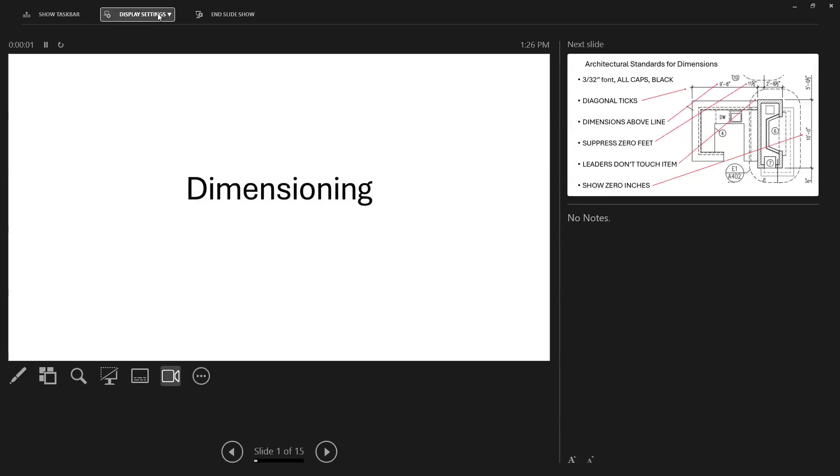Okay. So you typically do dimensions at 3/32 font, all caps, black. You do diagonal ticks. Architects don't use little arrowheads on their dimensions. They use diagonal ticks. That's what this little 45-degree angle line is. The dimensions go above the line. They don't stop the line and then float in the middle of the line. The line runs all the way through and the dimensions are above. You suppress 0 feet, so you don't show 0 feet, 11.5 inches. You just show 11.5 inches.

The leaders don't touch the item. This line's called the leader. This is called the dimension line, and that's called the tick. So the leader doesn't actually touch the item.

Now, Revit's got this all kind of idiot-proofed, and AutoCAD does if your people have set up your dimensions properly, but it's possible to mess this up if you set up your own dimensions and you don't know what you're doing. But you do always show 0 inches. So you don't show 0 feet, but you always show 0 inches. So if I have a 10-foot 0-inch dimension, I always show the 0 inches. Any questions on any of that? Okay.

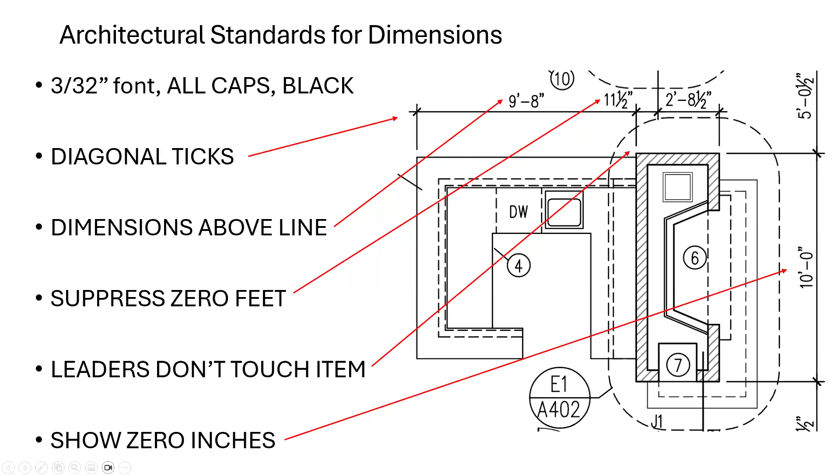So dimensioning, best way to dimension stud walls. I found this on an online forum. Now this is actually pretty smart. If this person hasn't been on the field or they're starting out in their career, apparently this office has a difference of opinion inside the office of how they dimension.

So this person says, from what I've seen, architects dimension interior walls one of 3 ways: face of finish to face of finish, face of stud to face of stud, or center of stud to center of stud. They do face of finish to face of finish, but he says it makes the least sense to me. We wouldn't dimension something that doesn't yet exist, but it seems like a lot of architects do it that way.

So they say the architect should communicate the intent, which is a 5-foot wide corridor, and leave the rest to the contractor and framer. It seems to me the clearest way to do it would be to face of stud or center of stud, since there can be no confusion as to which side of the line the studs go. So anyway, let's move on to what the contractors came back with.

I dimensioned to face of stud for exterior walls and interior walls. Having snapped out decks and slabs for wall plates, that is what I prefer, and that is what's preferred by the framers and builders I know. A note is on all plans stating that unless otherwise noted, exterior walls are 2x6 and interior walls are 2x4. A key is used to call out exceptions.

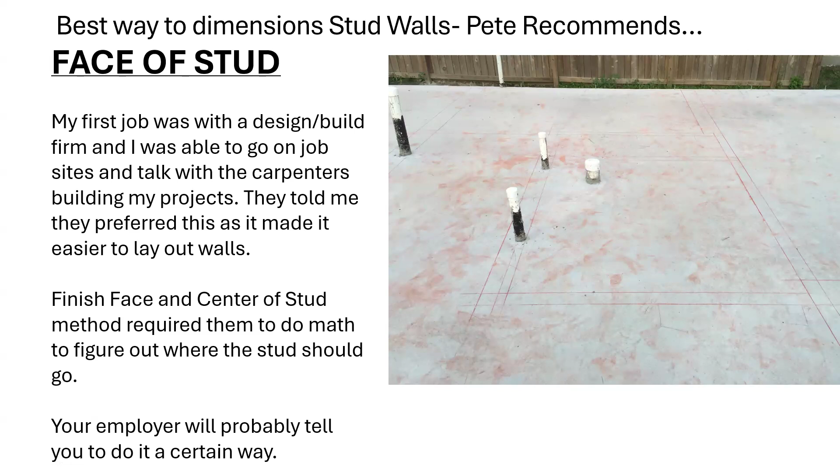And they said they always wanted me to go with face of stud because it made it easy to lay out walls. The other ones, if you go to finish face and center of stud, they have to do math in their head before they can figure out where they're gonna snap those lines. Cause like this line is 3.5 inches wide for putting a 3.5 inch stud wall on there. And they have to do math in their head. Now, having said all that, your employer might have a certain standard that you have to follow. But I'm gonna try to convince you why snapping to face of stud makes most sense.

So once those lines are snapped, they actually use those snapped lines on the deck. So you can see here, here's the line snapped on the deck with the chalk lines. And now this person is actually going to be building the stud wall, laying flat on the deck, and they're using those snapped out lines to mark where they have to put their partitions in the wall.

So I'm gonna show you two quick videos. One shows how they go through and lay out these studs.

I wish Daniel was here because he was a carpenter. He can tell me if they did it this way or not.

And then I'm going to show you this where we'll skip to the parts where they show them laying out the house with the chalk line. So let's first watch what's involved with the contractors to figure out where they put the studs in the stud wall.

That's what we did. When you work construction? Yeah. Okay.

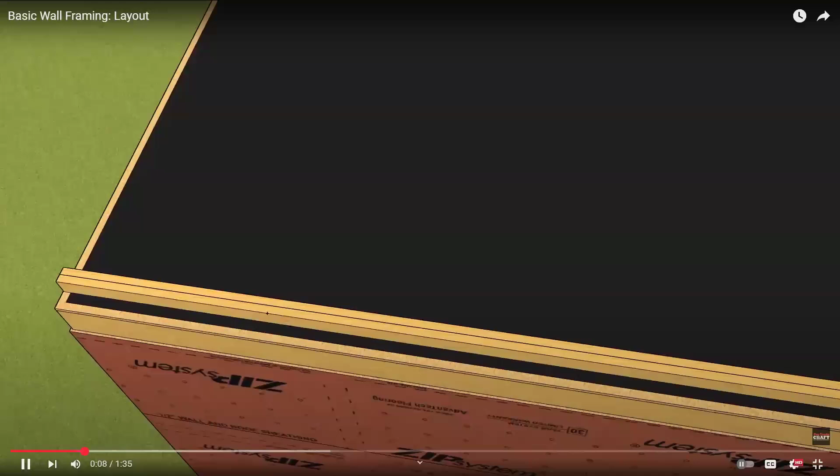Wall framing is the art of marking meaningful hieroglyphics onto wall plates that represent finished wall. Begin by stacking the top and bottom plates together. They should be exactly the same length, or the wall will never be square. Hook one end of the wall plates and work your way down to the other, marking the centers and rough opening size of all windows and doors.

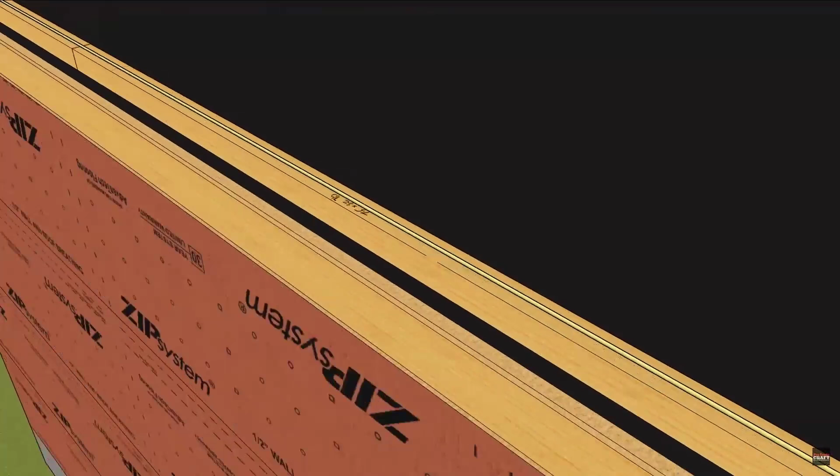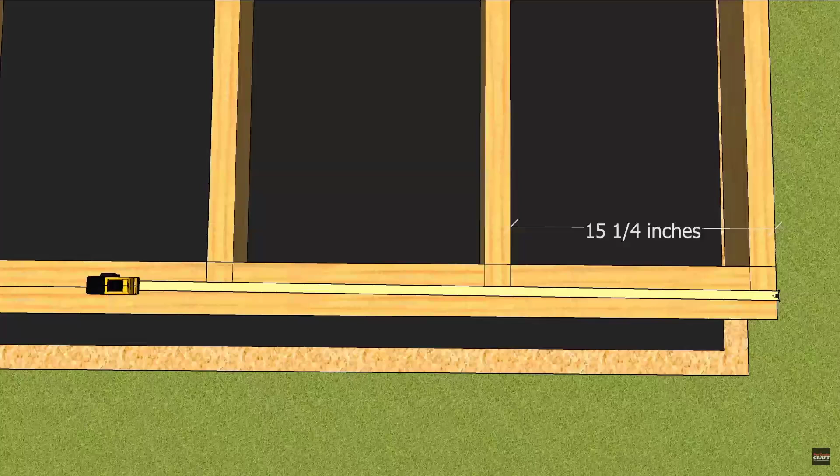When you reach the end, hook your tape on that end of the plates and work your way back, marking stud layout. For 16-inch on-center framing, the first stud line goes at 15.25 inch, which places the center of the stud at 16 inches. Following studs are also marked 3/4 of an inch before the red stud marks on your tape measure. 31.25, 47.25, 63.25. The line marks the edge of the stud, and the X indicates on which side of the line to put the stud.

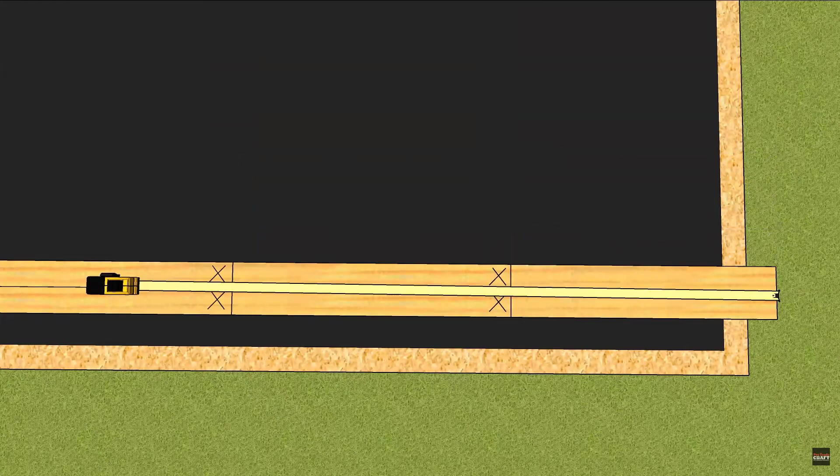Keep marking through the rough openings because partial studs will go above and below the window opening. When the plates are laid out, spread them apart, frame the window openings, and then fill in the studs. We'll cover framing window openings in another video.

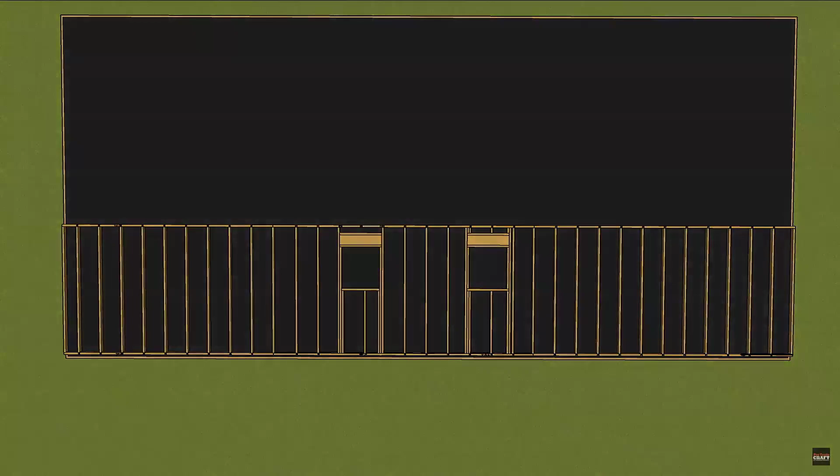Okay, so that's the fine points of laying out the stud walls. Now I want to show you the time lapse. I don't know if you know this, I probably showed you other time lapses. I love construction time lapses. So I'm going to skip around on this, but I want to show you when they're laying out the walls and framing the walls down low.

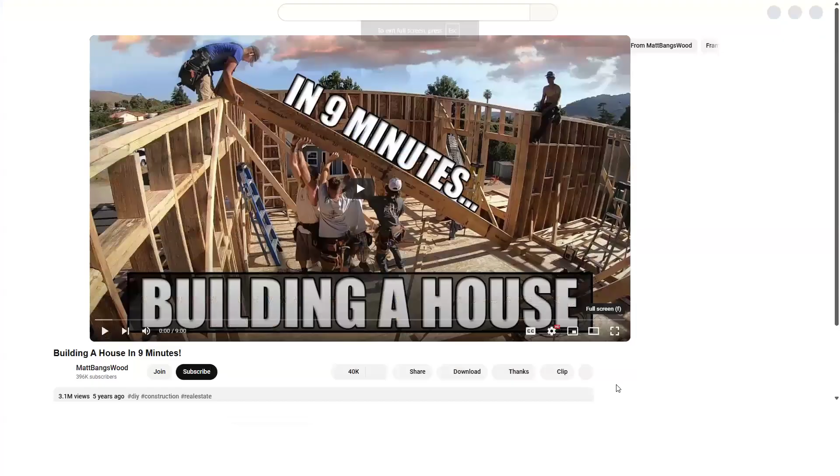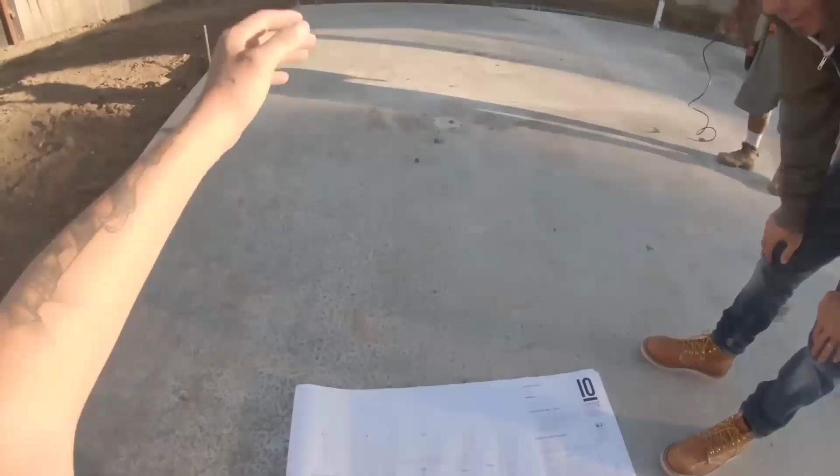So we'll snap this back wall first. There's a separation detail between addition and existing. So we'll snap 5.5 back wall on here. We can snap these guys, go parallel across, and go from there.

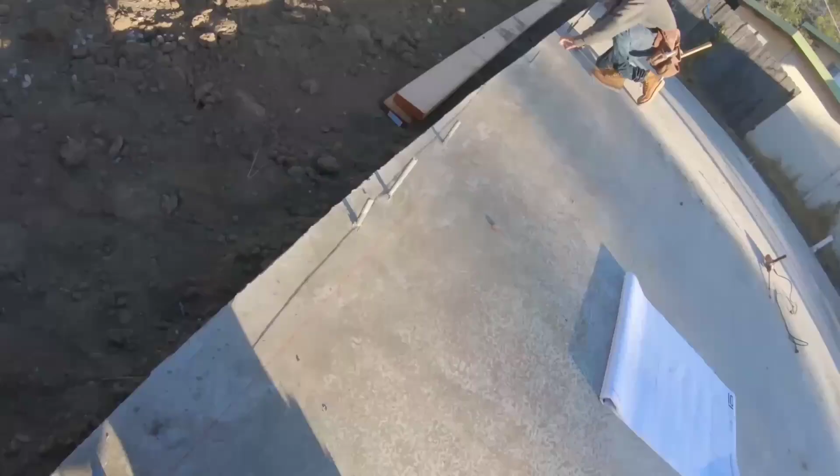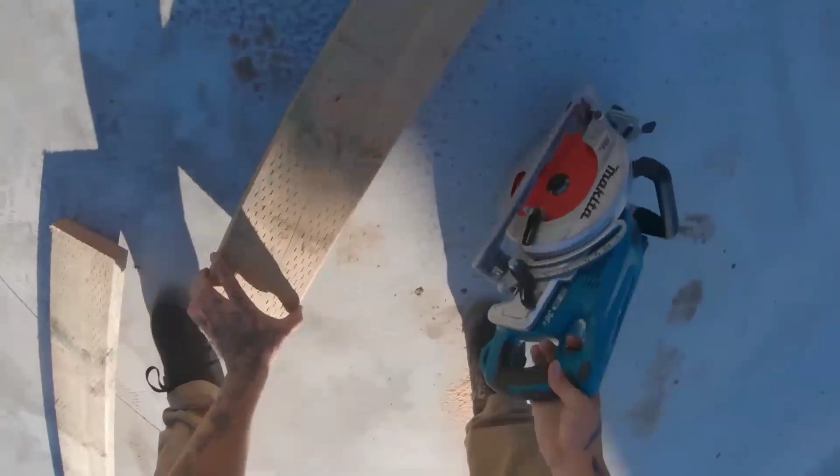Well, they're marking where the anchor bolts go.

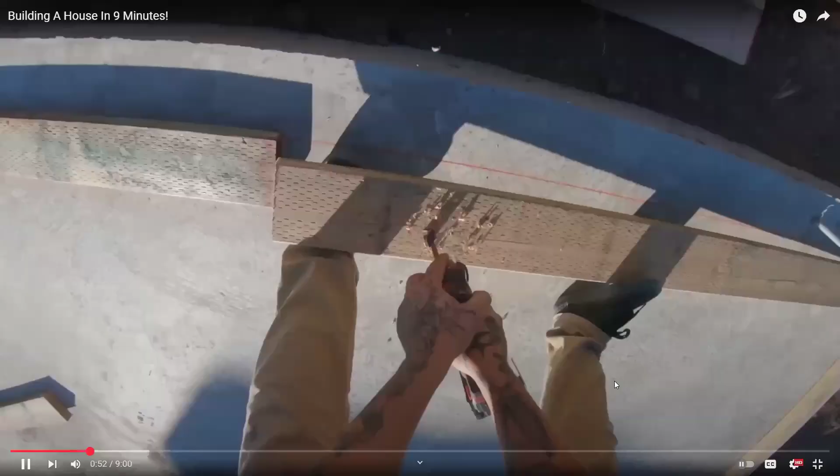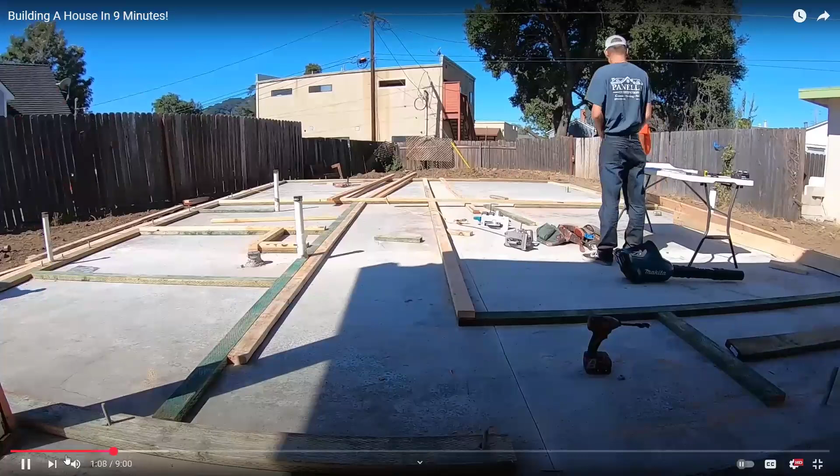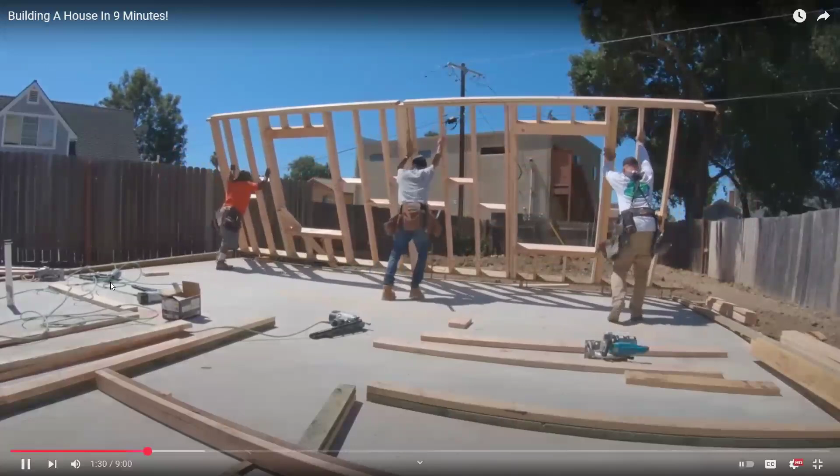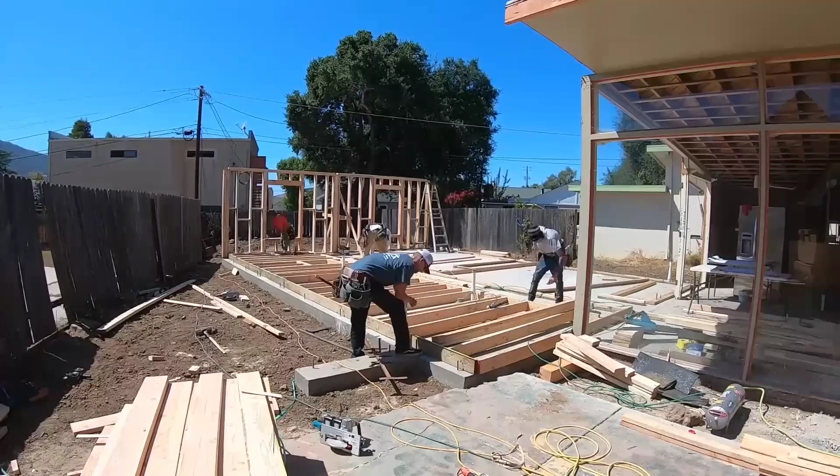So you see them looking at the plates that they're marking, and then they lay out the studs, build the wall flat, and then they tip it up. You can see there, they've done their layout. They're building the wall flat based on these two plates that have been laid out.

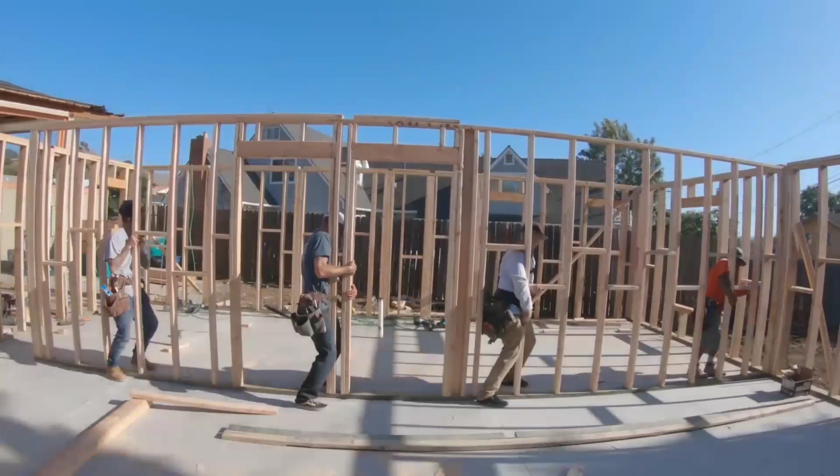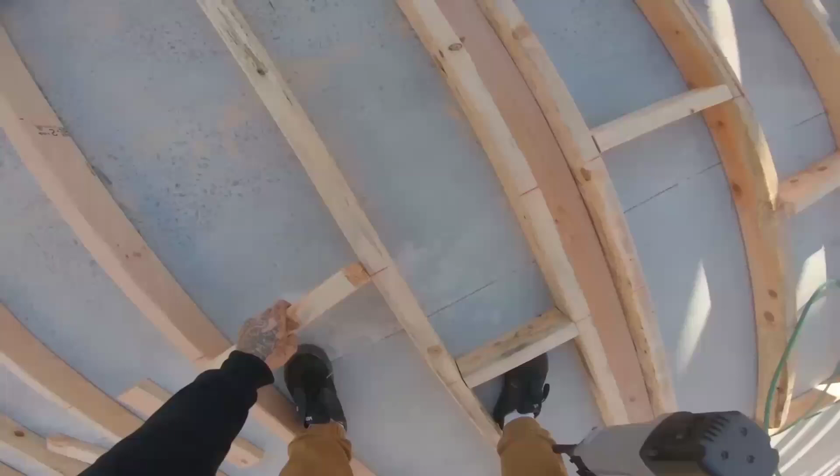This is California, so they have to put those horizontal blocking between the studs. Those little horizontals are for earthquake resistance. So that's for lateral stability in an earthquake. You don't have to do that in Wisconsin, but you do out in earthquake zones.

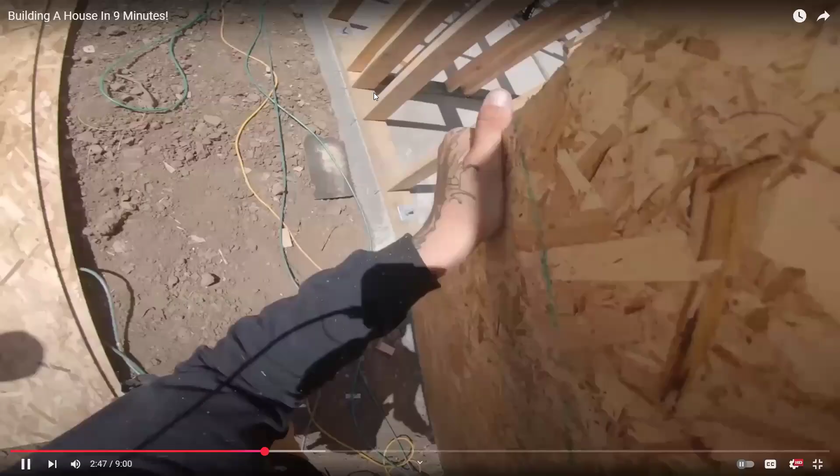And here you can see how the double top plates overlap each other. So that's how they tie the walls together with the double top plate.

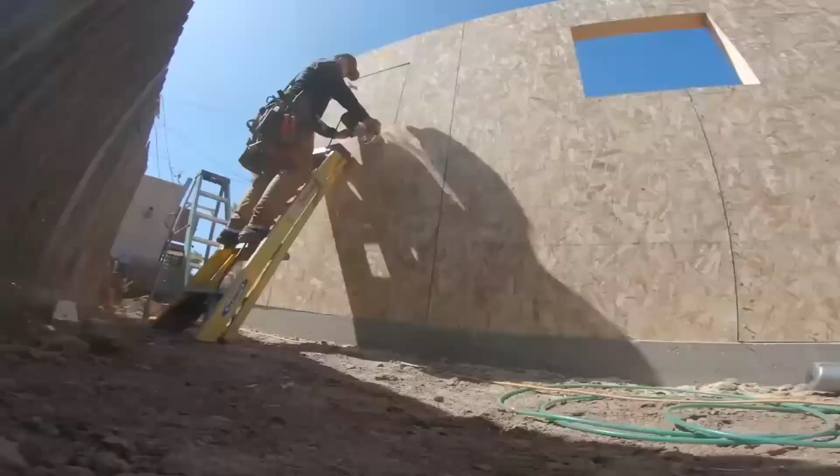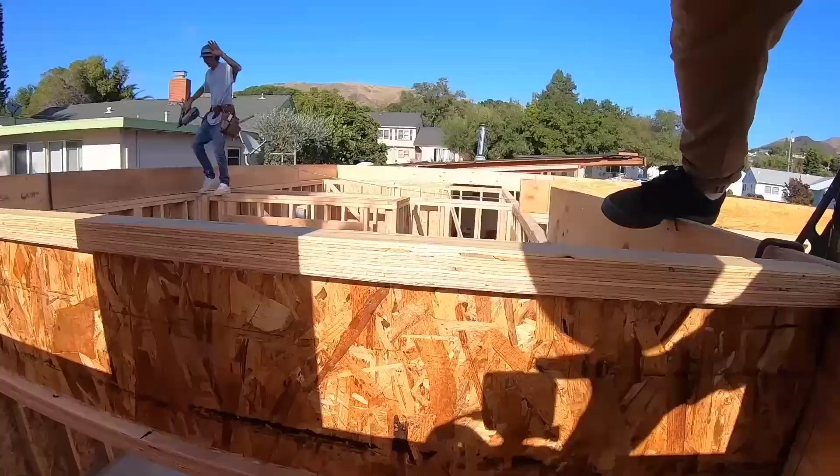So if you're scared of heights, imagine that you're walking around on top of walls, laying out floors. No safety harness tie-off because there's really no way to tie yourself off because there's nothing up above you yet.

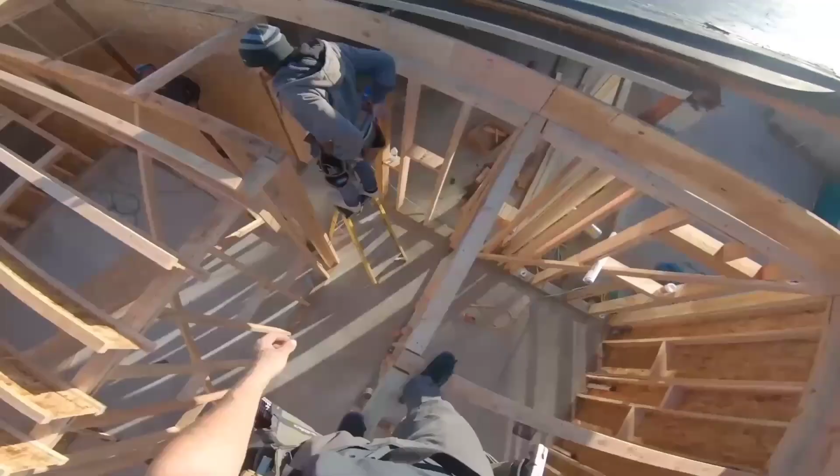Doing all right. We're having fun out here.

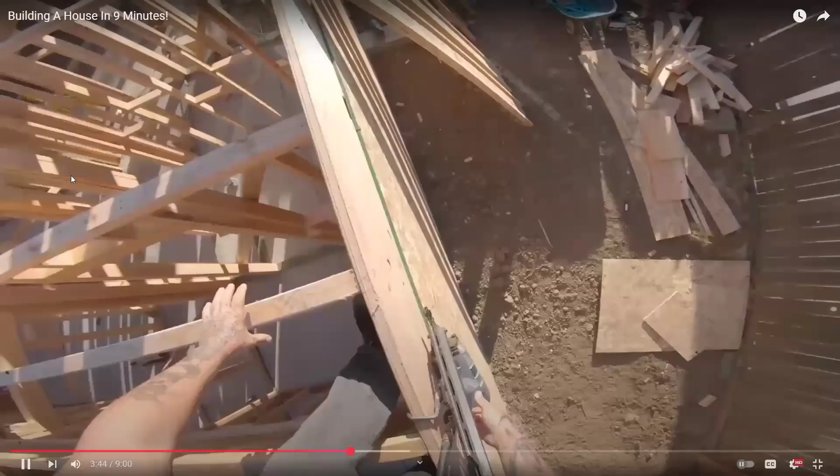So this is why people my age aren't typically working construction, because my sense of balance, if you saw me walking across the top of a 2x4 stud wall, there's no way. It's not going to happen when you're 60-some years old. So it's not a bad idea, if you are older, to do something like we're learning for, where you're not going to injure yourself. The only injury we're going to get in our profession is maybe carpal tunnel syndrome and then mental illness. Right? It's not going to be a physical injury.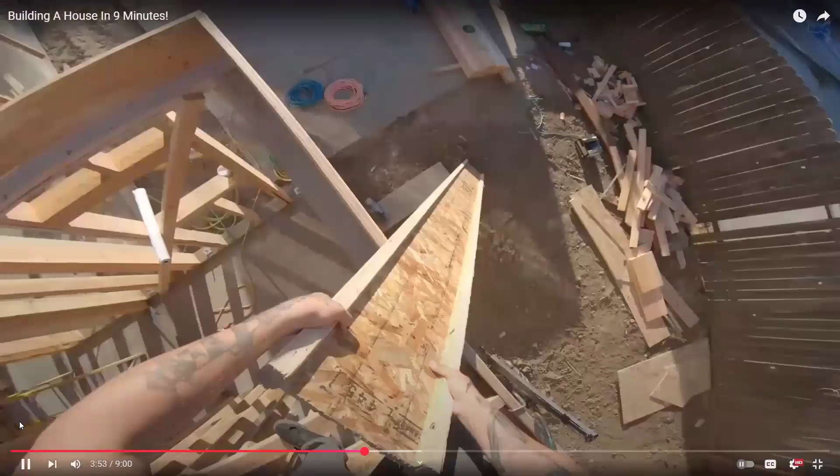So that's the purpose of the rim board or the rim joist, is to stabilize these things as they put them up there.

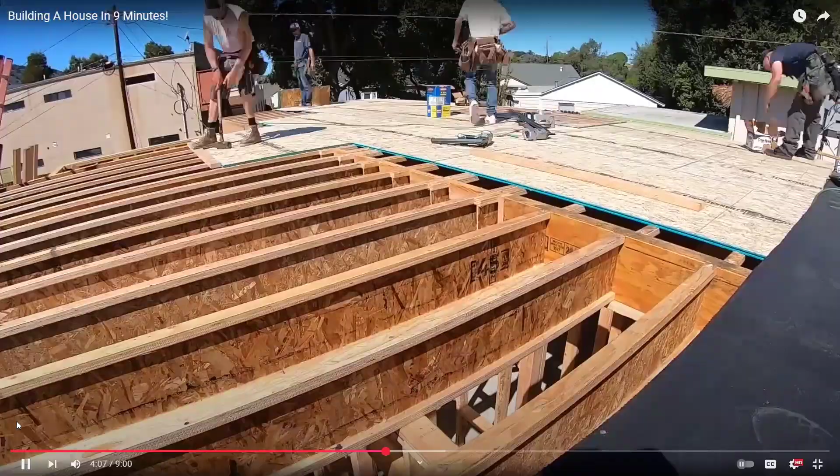So now you can see I'm using construction adhesive for the second floor deck.

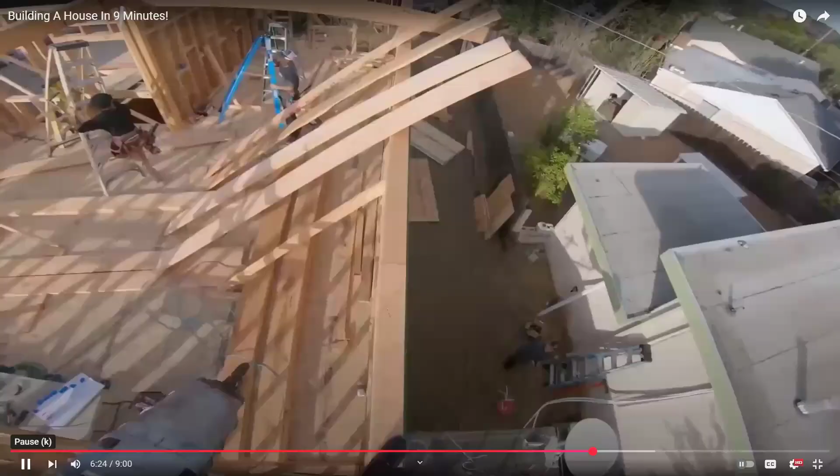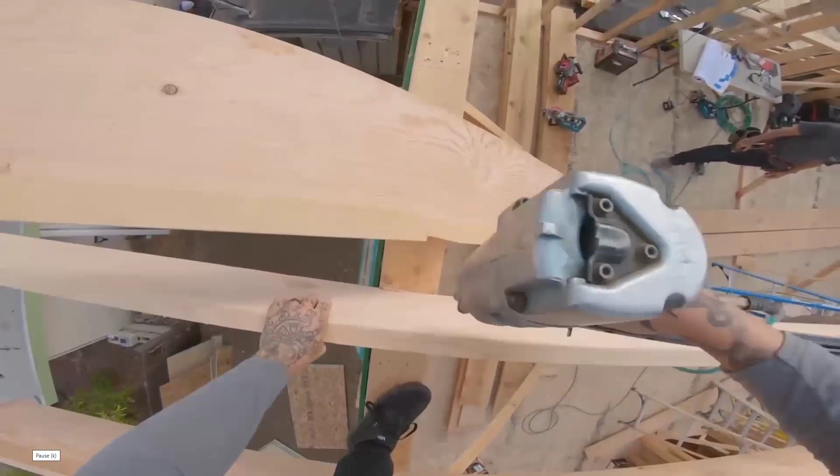So this looks like a big honking micro lam. They're calling it a Versa lam out in California. Beam that's going across. And again, walking, no safety net. These are the rafters. And they're using just toenails to put them onto the roof. They'll probably put a Simpson hanger in later.

Now, just to let you know, on our Habitat Workday, we have veto power if they tell us to do something that I think is too dangerous. So the last one we did, they had us working on simple stuff like putting Tyvek on or pouring the footings. But then at an afternoon shift, they wanted us to crawl up inside the trusses and put these 2-foot blocking pieces like they did in the studs up between the trusses. And they didn't have a lift or anything, so they wanted us to actually hang on the trusses after we climbed up there on the ladder and nail it in.

And I'm like, nope, time out. We're not professional construction workers. We're not going to do that. So if you do go to the job site and there is something that you're asked to do that you're not comfortable with, we have total veto power of what we do. I don't think they're going to have us do anything dangerous because this is an existing house, but just keep that in mind.

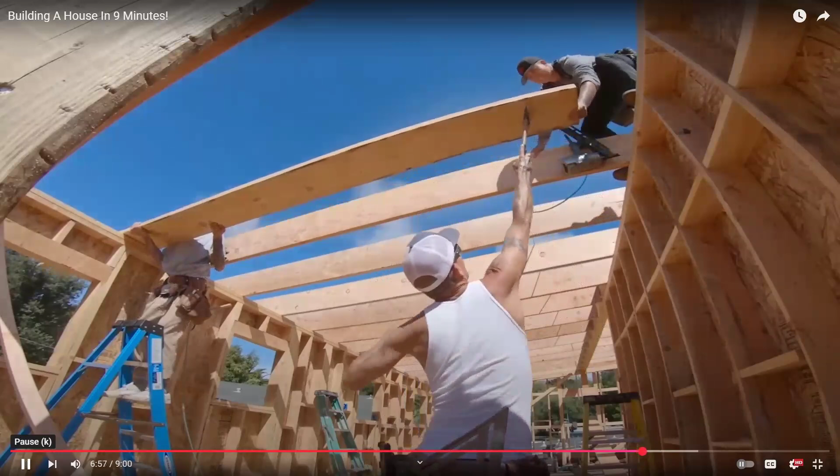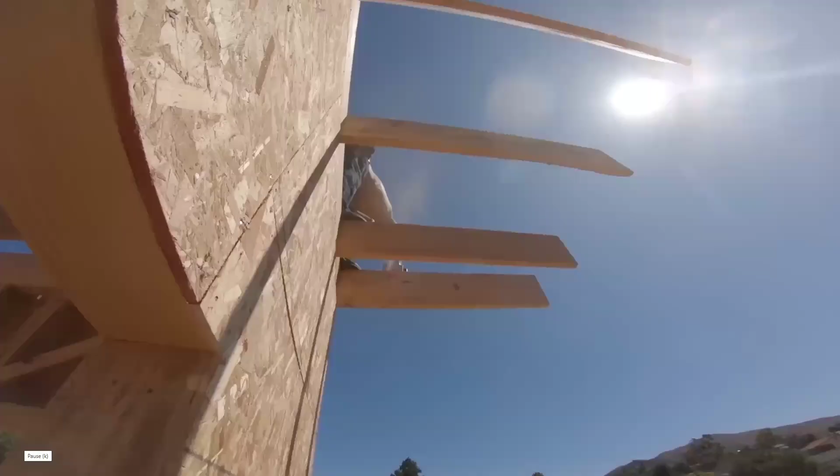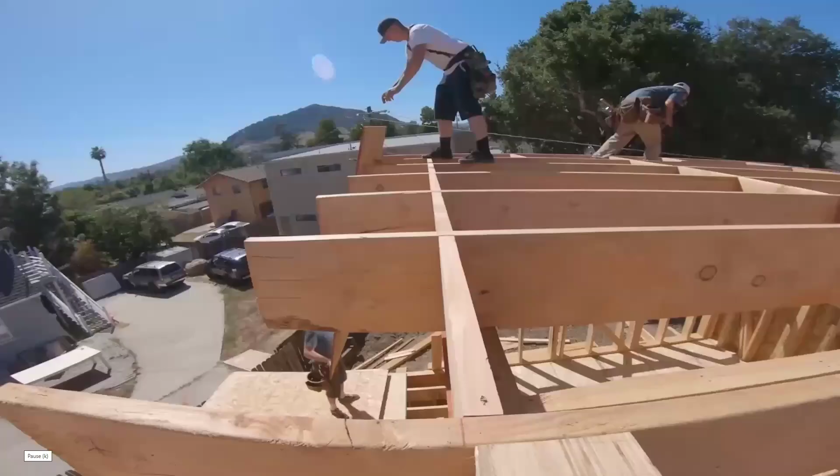I'm scared of heights, so I just get creepy looking at these guys walking around 2 stories up. Okay, I'll let you watch the rest of this if you want to. But first off, have a lot of respect for the people that actually build your designs when you're on the job site. It's a really tough job. And if they make mistakes, they're typically trying to do a good job. They're not trying to mess with you.

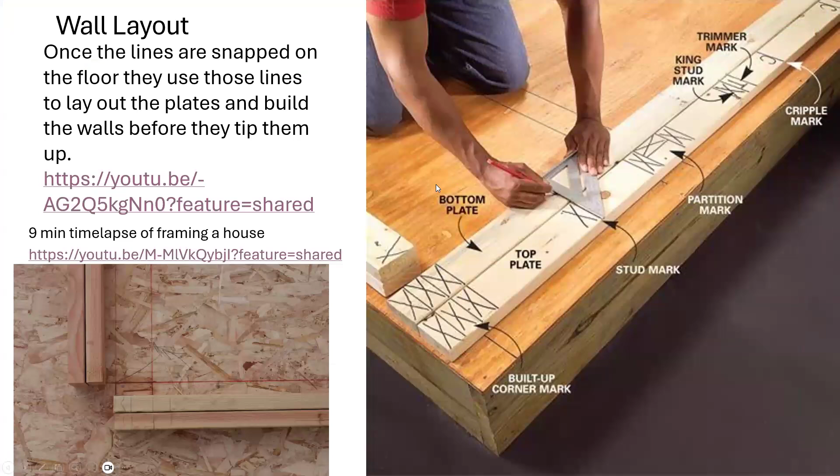Okay, so let's go ahead and continue on with my PowerPoint. So my strategy on dimensioning doors. Most doors are tight to an intersecting wall. So I do not dimension those because, depending on the kind of trim you have, like on a commercial door, you're just trying to get probably 2 studs in there with metal studs. So I'll let the contractors figure it out. They know I want the door so that it opens up at a 90-degree angle and the doorknob doesn't hit the wall because it's too close to it. So I let them figure it out. I don't dimension where these doors are.

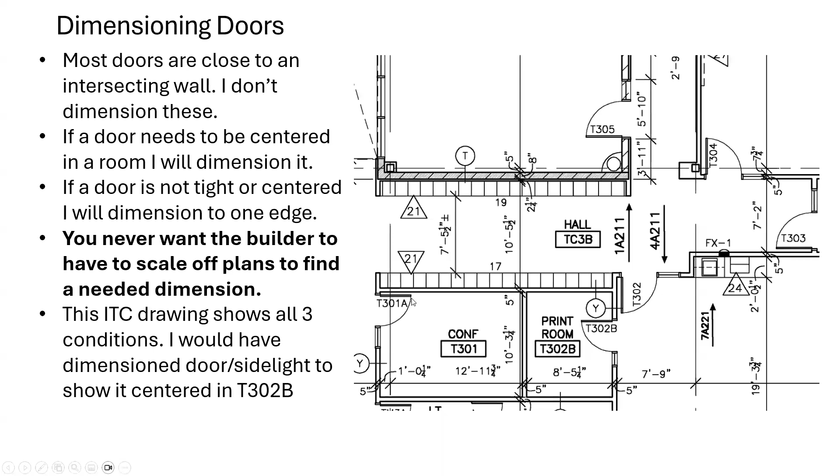Now, this is HSR's drawings for this building. If you have a door that needs to be centered on the room, I will typically tell them to center it. To me, it looks like this door side light combination needs to be centered in the room, so I probably would have put a dimension in there. Or I'll dimension it to one edge. For example, they needed to get this door away from the little goofy HVAC thing in the corner, so they gave a dimension to the edge of that door of 5'10". So this has 0 dimension, this has 0 dimension, this has 0 dimension. So we don't ever have to dimension exactly where these doors go if they're in your typical location up against the wall.

Okay, so now I'm going to show you how they actually dimensioned it in the Integrated Tech Center. Again, this was done in AutoCAD. So this is a type Y wall. You see the little lollipop with the Y. So it's a 3 5/8 inch stud with 5/8 inch drywall on both sides. The actual dimension finish face is 4 7/8, but they didn't want to put 4 7/8 in every time they dimensioned a wall. So they just rounded it up to 5, and that's what they put on the plans.

So if your dimension is at 5 and you're putting a 3 5/8 inch steel stud, where do we put that on the plan? What kind of math do we have to figure out? In relation to 5 inches, where does my 3 5/8 inch stud go? What's the dimension on each side from the 5-inch dimension to where the stud actually goes? Anybody come up with that in their head?

So let's do the math. So 3 5/8, it would be 5/8 inch if it was actual, right? Because it's 5/8 inch drywall on both sides. So it's actually 5/8 plus a 16th, right? Because it's got to get up to 5 inches. So it's 5/8 plus the 16th. So it's really 11/16 in on both sides.

Does that make sense? So these poor people laying out this thing, when they were snapping out walls, they had to do 11/16 in from the 5 inch dimension to where they were actually going to snap the line for their 3 5/8 inch stud. Does that make sense? No, it's very hard to do.

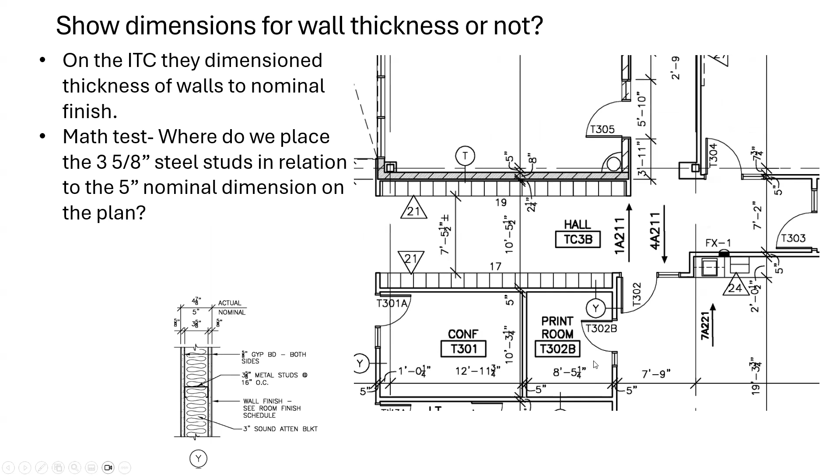Same thing on this commercial building. And this was at an 1/8 scale plan. We dimensioned every stud wall, because there's different kinds of walls. There's masonry walls with furring on it, and there's other walls. So a lot of times they will dimension through the studs.

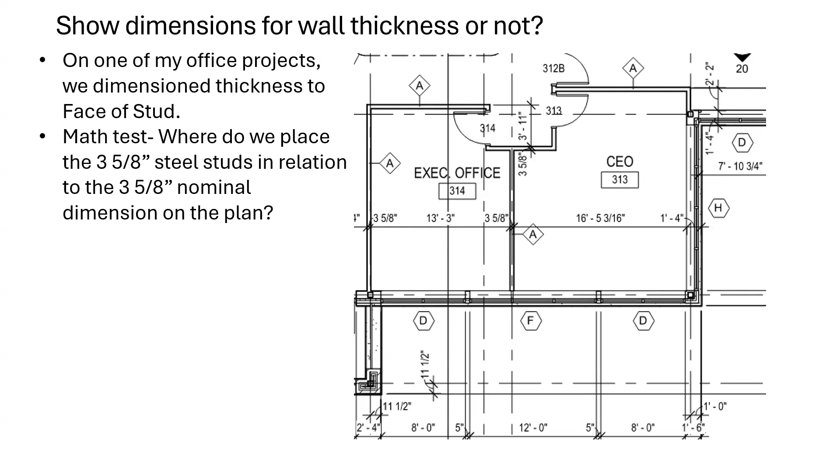Now, on a residential, like that first form we found on the internet, you don't have to show the wall thickness at every wall. And it's often done on residential projects because typically we have 2x4s on the inside and 2x6 on the outside. So that saves time and it makes the drawing cleaner.

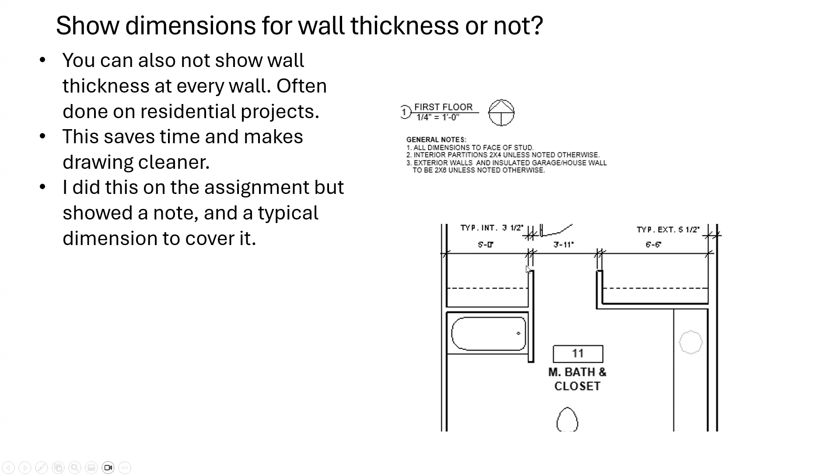So on the assignment, I'm giving you a Revit file. And I did an actual note that says typical interior 3.5 inches, typical exterior 5.5 inches. And then you can also say something in the general notes to cover it. A typical note covered it as well. So that's the way you don't have to show the thickness on every wall you cross through on a residential project.

So let's talk about exterior dimensions. You have 3 strings. The overall from one end of the house to the other is on the outside. Every jig and jog is on the next one in. And then the windows and doors, if they need to be dimensioned, are the ones closest to the house. So this is, again, what I'm going to give you for the assignment to dimension. And in this case, I wanted it dimensioned centered on my 24-foot garage. So in that case, I dimensioned it to the center line.

And I've got another slide here, but you can see here's another one. Now they drew their closets at 2 foot 1 deep because they wanted them 2 foot deep in the finish when they put the 1/2 inch drywall on. And I'm also okay with that. 2 foot or 2 foot 1, I've seen them go both ways.

But you typically dimension your inside partitions on the inside and your exterior wall things on the outside. You don't dimension your interior partitions on the outside. You dimension the inside stuff on the inside and anything in the exterior walls on the outside.

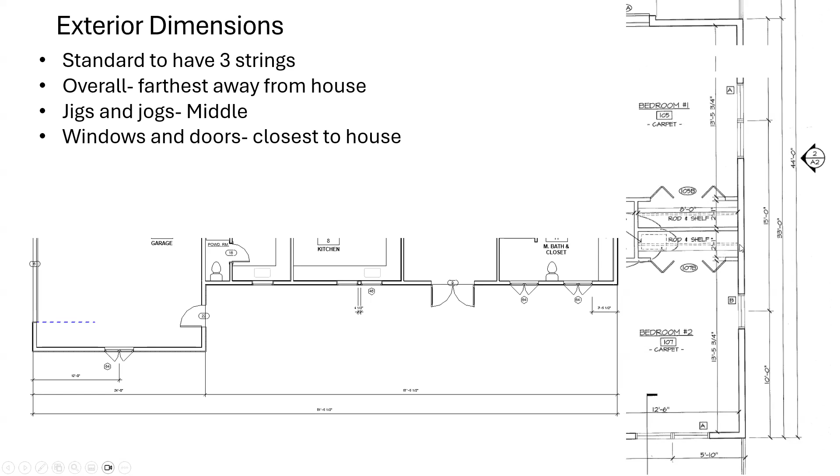So as I mentioned, if you don't know the actual window dimensions, it's fine to just dimension them to the center. Dimensioning them to the edge is good if you know the exact size of the window, or if I need that window to be like 3 foot 5.5 from that outside corner, I can go ahead and dimension that. But when you have grouped windows where the windows are coming individually, but you're going to put some studs in between them, you typically dimension that so they know how far those windows should be apart.

So in this case, I've dimensioned this as 4.5 inches, which would be 3 studs, right? 1, 2, 3 at 1.5 is 4.5 inches. Now you can see here, I did not round this up to the nearest 4. I did not change my dimensions on this house to the nearest 4-inch module, but we're doing that on Habitat just to talk a little about modules.

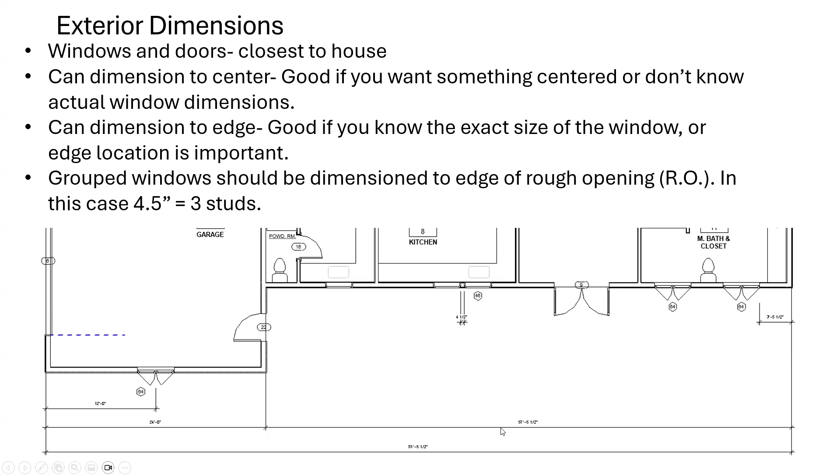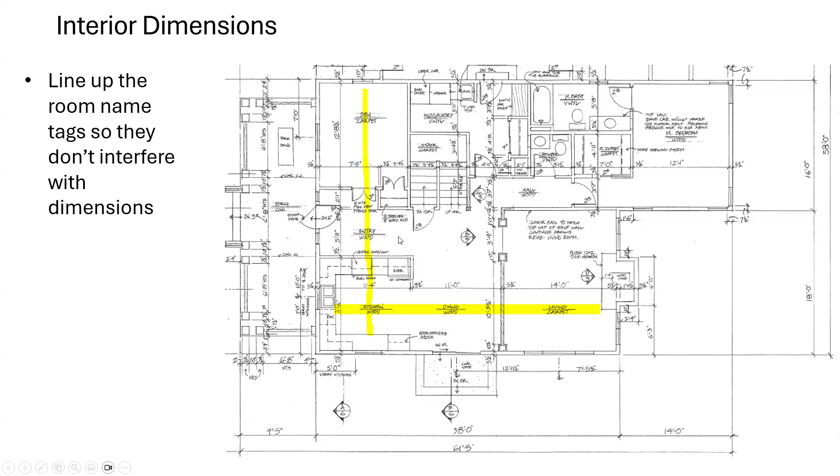So now let's talk about dimensioning. You typically want to line up your dimension strings through the building. So figure out a place where you can catch a bunch of stuff and then run this through that location. So I actually ran that through this location so I could get each side of my stair. And I could get this closet and these little rooms here.

See, so if I dimension the powder room and the master closet, I don't have to give them another dimension for the master bath because this dimension string actually gives them the location of both walls on the left and right of the master bath. So here again, I picked one where I went through.

Now you notice I did not dimension all my cabinets, like how wide they were and exactly where all this stuff, like the refrigerator, went. I let the kitchen designer figure all that out because they can do filler panels and they know the modules they're going to do. So in my kitchens, I don't go through and dimension all the cabinets.

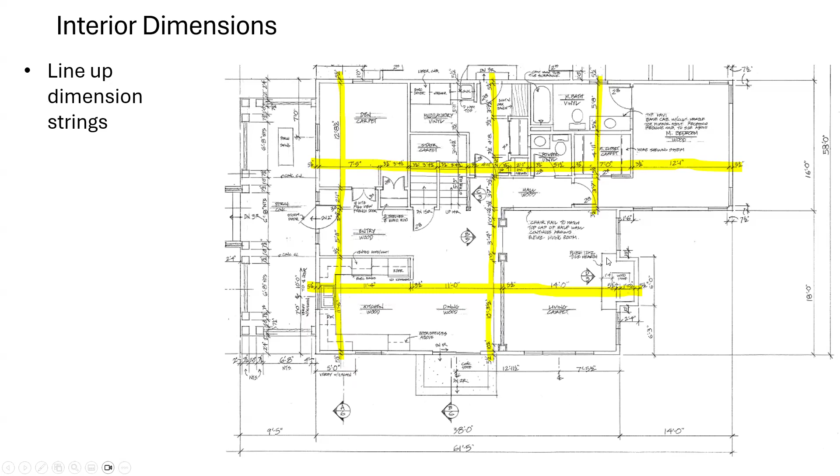Now notice here again, I've got a string that lets me pick up this wall, and then how deep that's projecting out there. And when I went up and down on this string here, it lets me pick out this opening for these architectural columns I had between the living room and the dining room. So the key on dimensioning is don't show more dimensions than are needed and don't show less dimensions than are needed. So let's talk about these two red lines individually.

Why didn't I dimension this one up and down? Why is there no... yeah, so the outside wall gives me that dimension, right? Because if I know the outside dimension and there's no other partitions there, I don't need to give them an interior dimension. The second answer is if they added up all these, this would give them the interior dimension as well. Same thing with this one here.

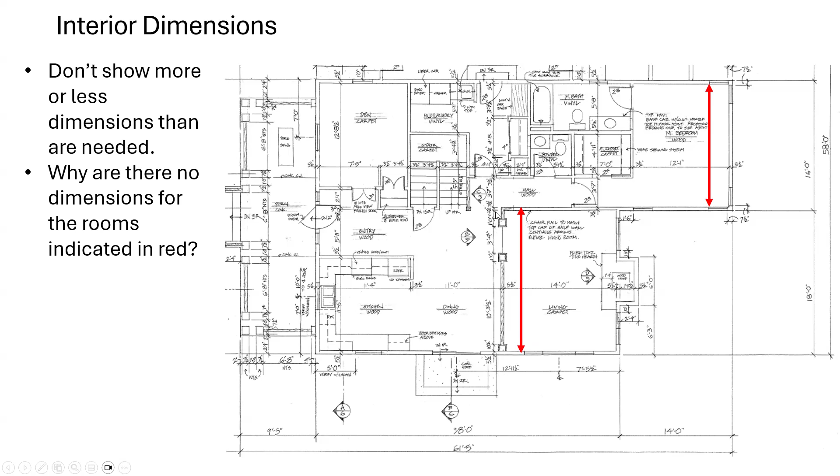Since this is lined up with an outside wall, and I've also got a dimension string here, it would be overkill for me to run a dimension string through there because I've given them the two things they need. This gives them the overall room dimension, and this gives them where that opening was, but it also, if you add it up, gives them the overall room dimension. Okay, so that's my little PowerPoint on dimensioning.

So now let's show you the assignment, what we're going to do the remainder of the week here. So I had this great idea that on Wednesday's class, I was going to buy some chalk lines and we got tape measures and I was going to give you a Revit plan. You're going to dimension it however you want. And then we're going to go down in the framing lab or out in the parking lot and we're going to try to snap the lines and see how hard it is and if we can get our building to be square.

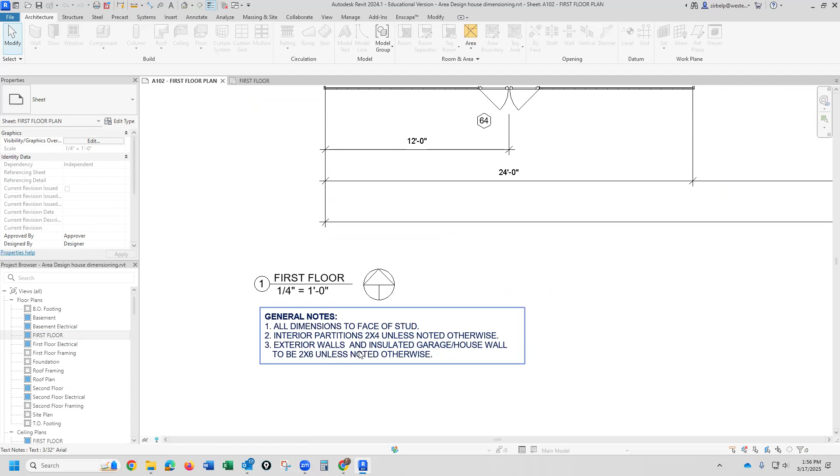So you'll notice, first off on the sheet, I did do a general note saying interior partitions are 2x4 unless noted otherwise. Exterior walls and insulated garage house wall to be 2x6 unless noted otherwise. In this case, I did actually show the garage as a 2x6. I know I told you that this is gonna be an insulated garage though. So you can probably remember this house. This is the one where you did your kitchen and bath design.

Now, don't judge my kitchen and bath designs, because I just did this crappy thing to just put something on there for you to do this assignment, okay? The service area isn't bad. This master bathroom design is a joke with the toilet. That's kind of my version of being comical, where it's facing the main entry door into the bedroom. So don't take that as my design skills.

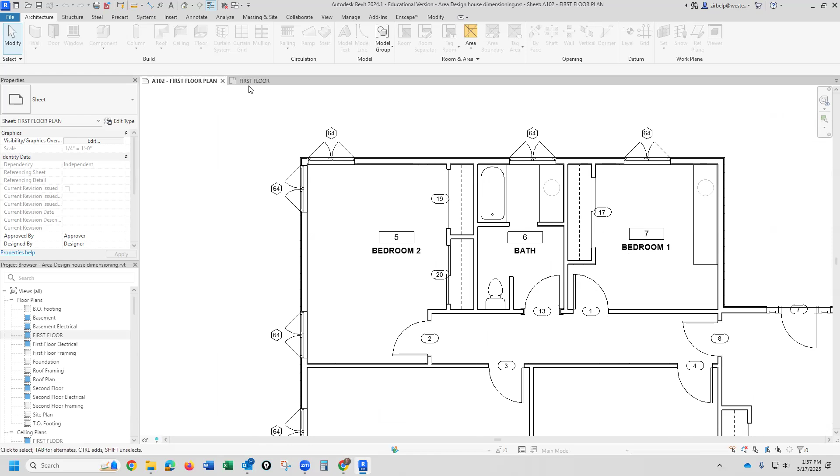So anyway, you'll notice that we have door numbers and room numbers, but they're not matching up. So we're gonna do like we did in the book. I've started some dimensions. Let me show you what you're responsible for. You're gonna renumber the rooms starting at 101 in bedroom 2. All remaining rooms should be renumbered in some logical sequence, not scattered all over. Only walk-in closets get a name and a number, smaller closets do not. So a standard 2-foot deep closet does not get a room name or number.

Then I want you to renumber all the doors to match your room numbers. I want you to dimension all 4 sides of the exterior, and all 4 sides should have an overall on the outside, jigs and jogs in the middle, and windows and doors closest to the house. Exterior windows and doors to be dimensioned to edges as appropriate. The garage window can stay dimensioned to the center since it's centered in the wall. And the framing between grouped windows, I want that dimensioned. Interior dimension strings should be lined up if possible.

Room names and door tags should be moved so they don't conflict with dimensions. I don't want things overlapping each other. The contractor should be able to build the house with the dimensions given without having to scale the plan. Dimensions should be placed to avoid duplicating the same dimension in multiple locations. Doors that open against walls do not need to be dimensioned. Doors that are obviously centered, like closet doors, don't need to be dimensioned.

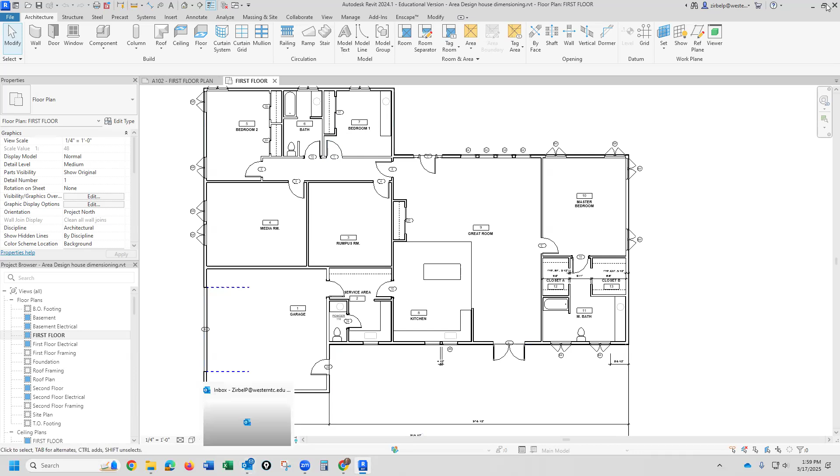Put your name and date in the title block and turn in a to-scale 24x36 PDF of sheet A102 in Blackboard. So this is how you're getting the points: 4 points for exterior, 4 points for interior, 1 for renumbering the rooms and 1 for renumbering the doors. I don't know how fast it's gonna go. You might be able to get this done today, or you might have to work on it in tomorrow's class. And then Wednesday's class, we're going to play by ear whether I can do my little assignment for snapping lines and laying out walls. Okay, any questions?

Okay, so I'm giving you more than enough time to do this in class between today and tomorrow. So I expect this to be as good as it can possibly be. So if you'd like to print it out and QC each other's or QC your own, we can work with that. I'll let you get started on them.